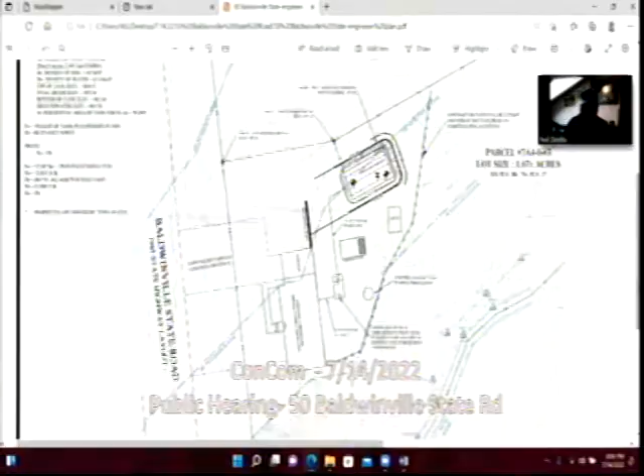And Chris, I have a close-up of the system on the screen, if you need it. Yeah, so you can see the circle just to the right of the existing tank. Actually, that's a proposed new tank. That's the existing leach field, or leach pit, that's failed. We are proposing silt fence and straw wattles around the whole site. It will be a pump system up to the proposed leach field area. It's about as far away as we could get it from the wetland that still made it practicable to pump to.

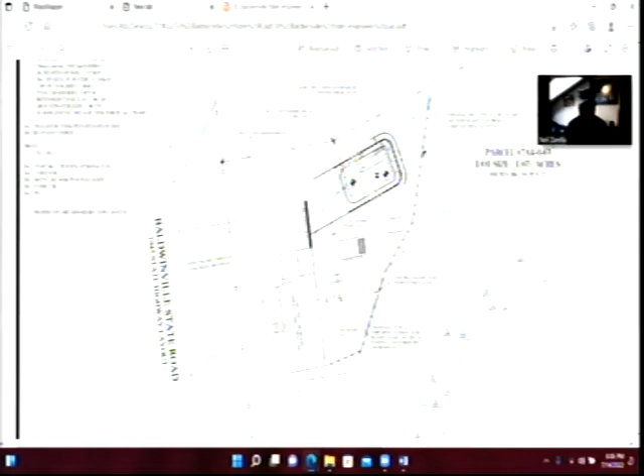Any questions, Matt? Do you have anything to say about this one? I don't have any questions on this. This is fairly straightforward. I think he's maximized the system very well. His erosion protection is more than sufficient. I think a negative determination is more than appropriate on this lot for this system. Any questions or comments from the board? I'm okay with it.

I'll entertain a request for negative determination. Make a request for negative determination. Second. All in favor? Aye. Chair votes aye. Thank you. Thank you.

And Chris, really good detail, by the way, for an RDA plan. Thank you. Oh, thank you. So, have a good night.

So we've got about 3 minutes till we can start our next hearing, so we could take care of Lionel's appointment.

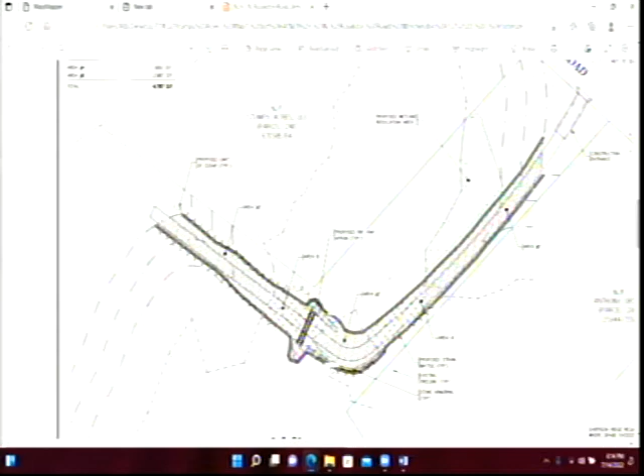And we've looked at this many different ways to try to minimize the impact. The wetlands are quite jagged around there, and this was the most efficient way that we could get a basic residential access. Happy to answer any specific questions from the commission.

So, if the commission, I don't know if any of you guys have been out there, but if you look at this lot, here are the lot lines. So you've got a very narrow strip, and it widens off to a very odd shape.

I will come back out with this. The MassMapper on, but it's, for some reason, it's not going tonight. There seems to be an issue with the internet not wanting to work. As you can see, internet connection is unstable.

Regardless, this area had a logging plan on it. Was it before your clients bought it? It was, that plan is at the very back of your packet, in the NOI packet, and it should be online too, or in the electronic packet. It also shows the shape of the lot.

But all the trees along this area where he is proposing the crossing, which is the only way to access the upland, is to cross here. This is a pre-existing lot. It's the only way you can access. The trees are already gone.

This is all disturbed land already? Yeah, it's all disturbed land already. I wish I could show you.

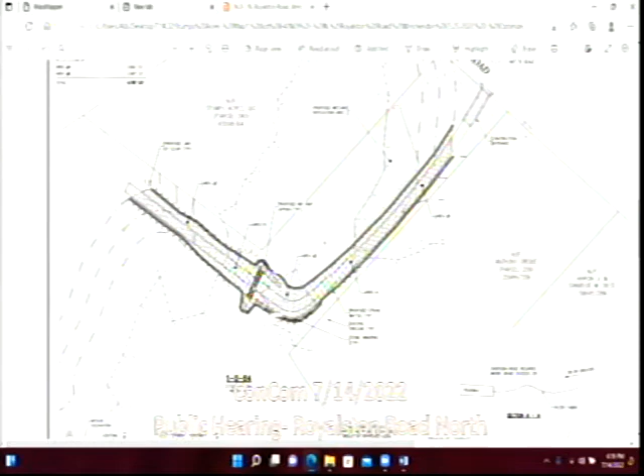If I could interject. Go ahead, Matt. To go into the question a little bit more, if you look at the plan, which I don't have up right now but will, the bulk of the debris is basically in this area right here. The real ankle breakers are over here. Over here, there is some debris that's gonna have to be cleaned up in order to facilitate the culvert.

The areas over here, probably the cleanest part of the cut. There wasn't very much left out there, and what's left out there, you probably don't need to touch, because it's probably just gonna make good critter habitat. What it looked like happened over here was that they used this little area as a landing, and in doing that, they just left it a mess.

So the replication and the driveway going across the lot proper in and of itself is gonna clean up that area. If there was any work done on this property, which is off the lot, that would be that owner's responsibility. I think it should probably be stipulated that the debris that's cleaned up should be taken off-site, not just piled somewhere on the property, because that'll create its own issues.

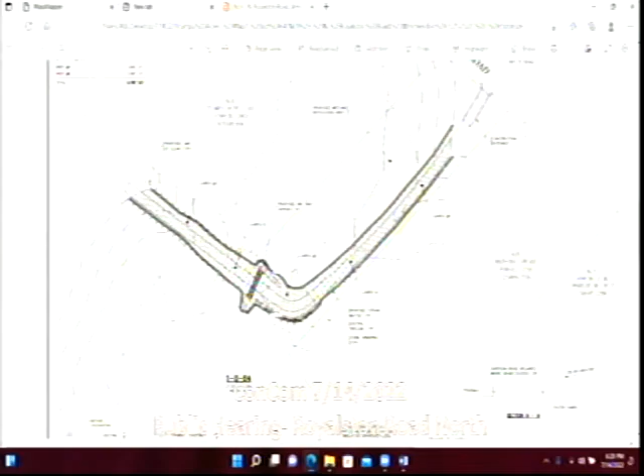Yeah, I don't see an issue with that. Are you guys all right with that? I think that's all right, yes.

I have a question for Matt. It's like we're building a dam, with water running down. I'm familiar with the lot, I went out and looked at it before, and the logging operation was quite extensive and messy. Looking at your elbow there, I'm thinking a culvert on each side. Right now it's dry as a bone, but in a normal year there may be a lot more water. We're building a dam and everything has to migrate to that one culvert. Wouldn't it be more sensible to put two or three smaller ones in where the water can naturally seep? We've done that in the past, that's just my take.

My opinion, if I may challenge that, is spreading out the height to get over the culvert using these... so you're going to have a little rise? Right, to get - we're not scooping out the wetlands in that area to make a depression for the water to get out. It's really dictated by the downstream grade. So that's your lowest point? That's the lowest point of that whole area, so that's where we set the initial outlet invert of the culvert, filled over from there with minimal slope, bringing it up. It would, in order to spread those - because it does have somewhat of a bowl shape, very broad - it still rises up from the lowest spot, so it would end up being more fill in the delineated wetland area.

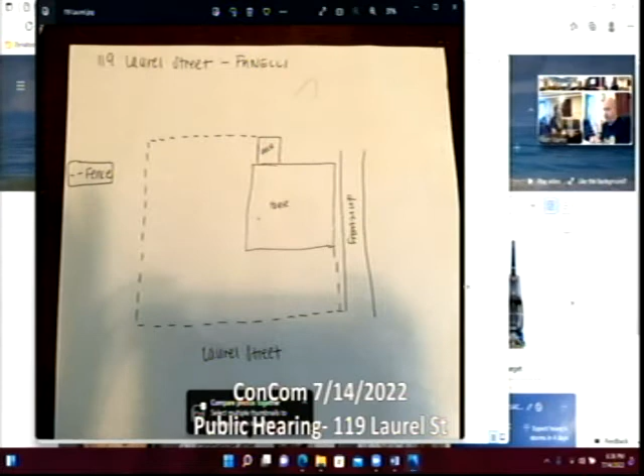What's the wetland? So let me go over this here. This is where my cursor is pointing - this is the driveway going in from the frontage off of Laurel Street. This is the front yard, goes around the side yard, heads to the deck. Now, calling up the MassMapper, which actually worked this time, that would encompass this area right here, around this way to the deck right here.

You can see it's hard to see from the detail, but I'm afraid to start zeroing in because I've been having problems with this thing, like all of a sudden cutting out. So this area right here, the wetland is right here. And essentially the backyard, the grassy area ends - it goes into a steep slope because apparently when the house was built, there was fill brought in to establish a flat backyard years ago. You have a really lush wetland system right in the back.

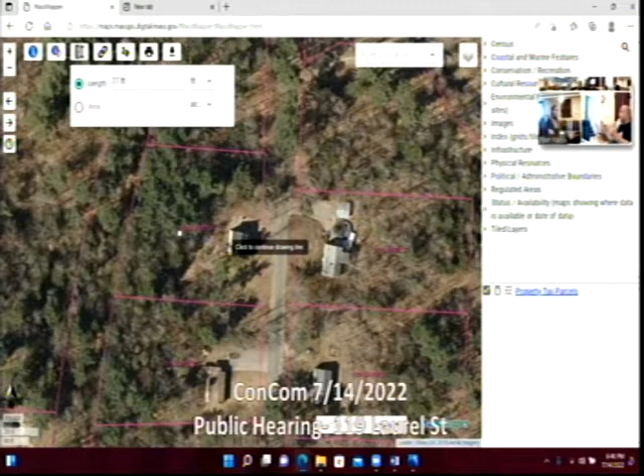If you hit this little ruler cursor right here, and length is in feet, we'll do it from right about here is where the wetland is. Closest point to the deck is about 77, well, we'll round it down and say 75 feet. So the fencing itself would be on the existing grass. There would be no vegetation removed. It would definitely be greater than 50 feet from the wetland area.

And in speaking with the applicant, I don't think she's going to have a problem if we require her to leave like a 3-inch space from the grass to the bottom of the fence to allow little critters to move through. Under the state act, this actually would meet the exemption criteria. The RDA and you guys putting in the condition for the space would cover you under your bylaw. So in effect, what you're doing is if you approve it, you would be giving her a permit under your bylaw using the RDA process, because it's a limited scope. So, that's my take on it.

How are you going to dig your fence post? With what? I'm not going to be doing it. Well, I'm thinking by hand is a good idea. Someone, not a machine, or a very small machine, I guess. A small mini machine or by hand.

If it's a small machine, it'd be one of those that digs a hole really quick, so boom, boom, boom, in and out, put the fence post in, back up, and you're done with less disturbance. We've got little single-man stand-up machines called skid steers, probably 6 feet long, and you could drill your post real quick with minimal disturbance.

You'll know if the fence company you hire is good if you tell them this and they look at you and go, well, what? If they don't know what you're talking about, you might want to keep looking. Or even a handheld auger - two men can handle it without driving any equipment in there. They make gas handheld augers that one man stands on each side of, and they can drill fence posts pretty easily and quickly without bringing machinery in. You can get them at any hardware rental place.

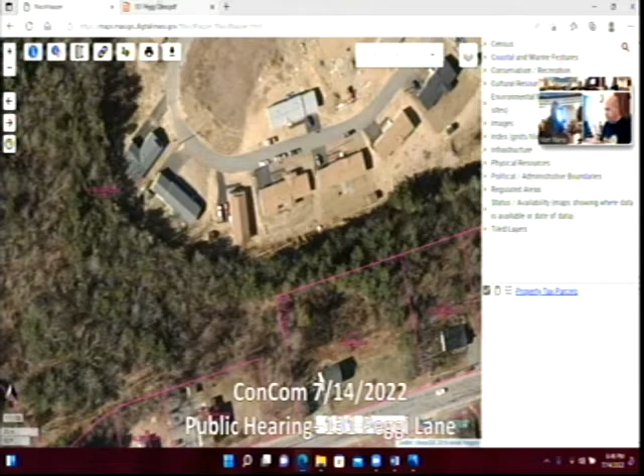The garage - that red car is parked up to the stairs that go to the house, so the front of the garage is approximately even with the front of that red car, so that door is in the garage and not exposed to the elements. The garage probably cuts across the center of that white truck. Here's the drawing I've got on the screen. You can see the buffer zone cuts through here. So pretty much what he's saying is it's starting here and coming out this way.

Which is basically what he's got here, so he is correct. This area right here is right on the edge of the buffer zone. It shows that way in his plans, and this came to my attention as a result of a building permit application. He went for two garages, one at 131 and one at 91. The one at 91 is totally out of our jurisdiction, it's out of the 200-foot zone and the 100-foot zone. In fact, this area right here is essentially out of the 200-foot zone, but it's not out of the 100-foot.

I don't believe this is in our jurisdiction either, because I think all we can do is condition it, since we can regulate out but we can't regulate up - he can build up if he wants. There's already an impervious surface, a permanent structure there in terms of a driveway. Agreed, hence why I had him file the RDA - we just have to condition how he does it. That's all I think we have jurisdiction over, but I don't think we could stop this project. No, I agree, and that's why I had him file the RDA instead of an NOI. I figured it was pretty easy.

Any questions or comments for the board? Drawing on a scaled plan, using the scale plan, that's very helpful.